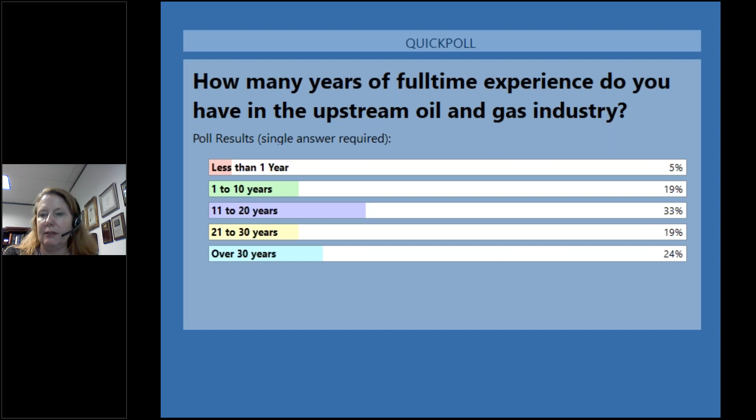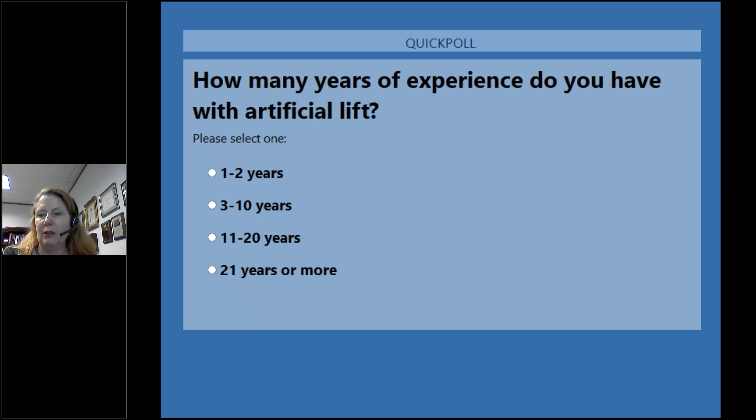Next question: how many years of experience do you have with artificial lift, since that's the topic we'll be discussing today? Looks like we've got a lot of experience in this crowd, pretty good distribution among all the different categories. We've almost got all the votes, so I'm going to go ahead and close that and share those results.

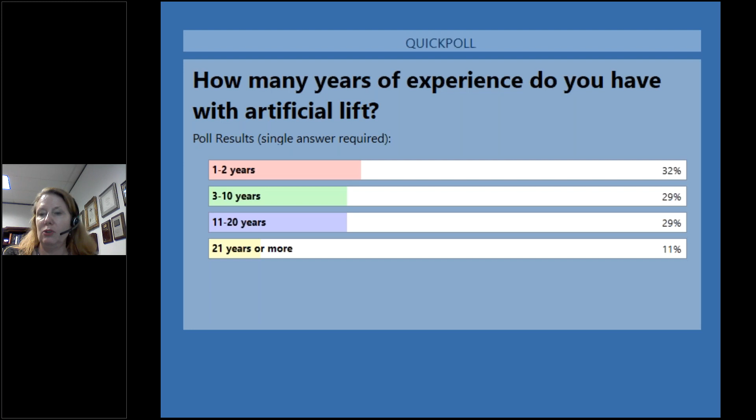It looks like the most are in the 1 to 2 year category, but we do have a pretty good distribution in all the other categories as well.

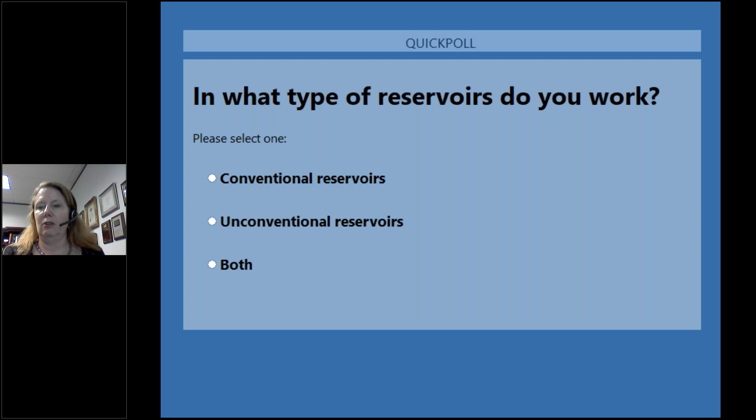Last question: in what type of reservoirs do you work? Either conventional reservoirs, unconventional reservoirs, or both. Looks like we have quite a few that work in both types of reservoirs. The vast majority, I would say, have experience in both types. We've almost got all the votes, so I'll go ahead and close that question and share the results. The majority of you work in both types of reservoirs.

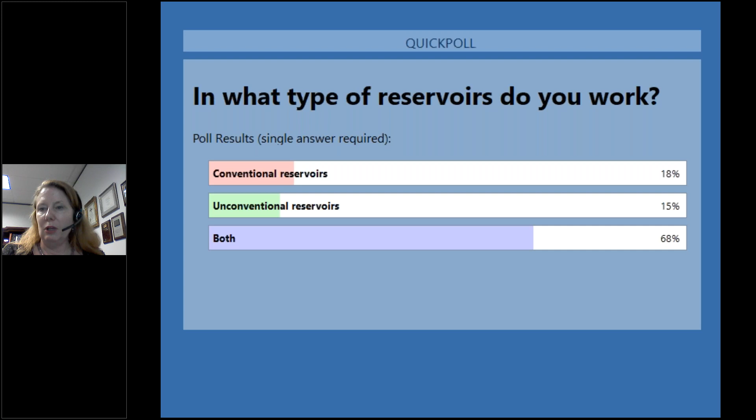I'm going to go ahead and give the presenting rights over to Dr. Chokshi. Let me, let's see, Joseph, can you help me with that, please, as far as handing over presenting rights? Yes, I'm working on that. Or am I going to show the slides from here? I guess you're going to show the slides. Okay, I'll go ahead and do that. Let me pull out of this slide presentation, and we'll move into the presentation here. Okay.

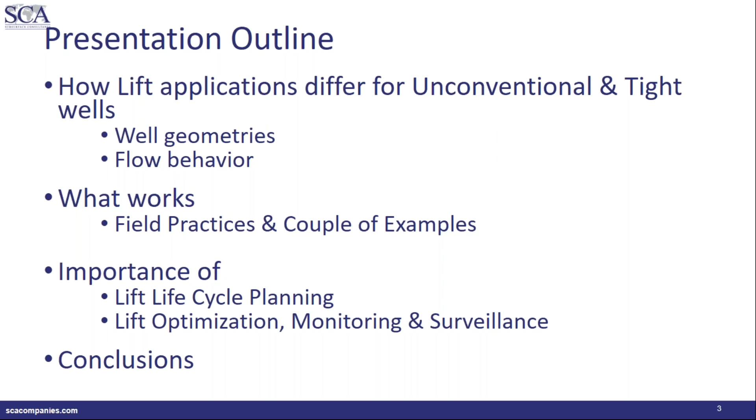The second important aspect is the optimization, monitoring, and surveillance of not only the lift, but in general, the production profile of unconventional wells. We'll conclude afterwards. Next slide, please, Susan.

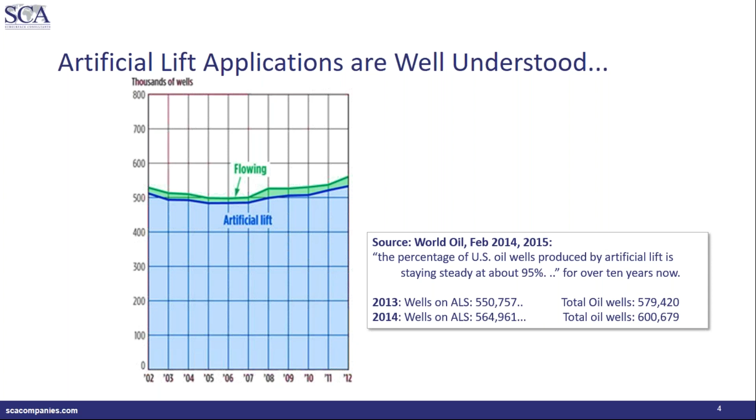When you look at the artificial lift application space, this graphic shows a World Oil survey they present almost every year. From a couple of years ago, they showed that for the past 10 years or so, the number of wells in the United States on artificial lift has remained at about 95% of total producing wells. In my estimation, this ratio might have increased a little, because unconventional wells, which have increased in number in recent years, most of them end up on artificial lift sooner compared to conventional wells.

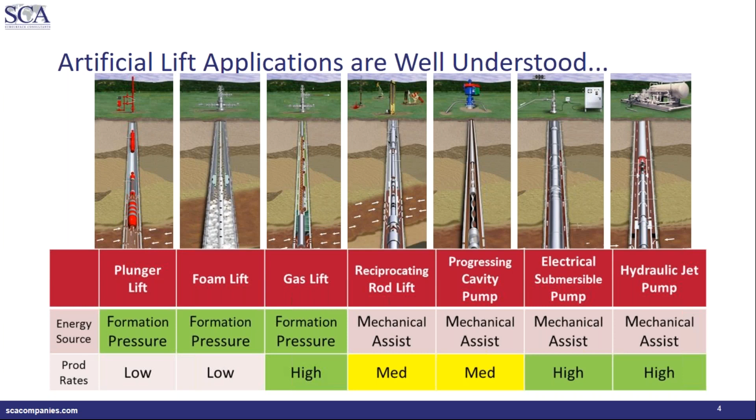In terms of production rate, we can subdivide these lift methods into different buckets: lower producers, meaning typically less than 50 barrels; higher producers, typically more than 2,000 barrels; and middle of the road. So you might say, okay, we understand all these lift applications, so why are we spending this afternoon talking about unconventional? Next slide, please.

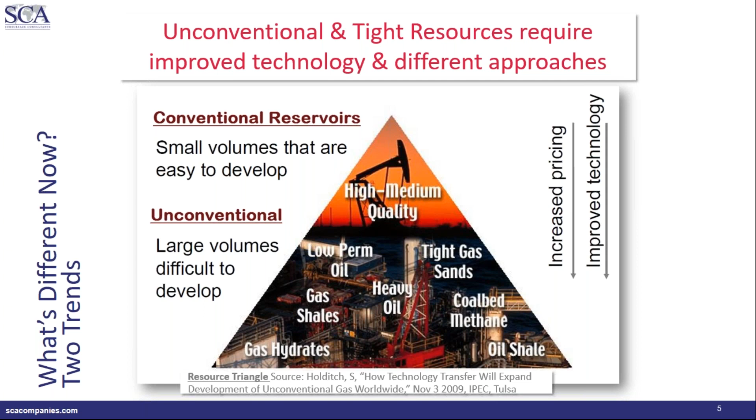So what's different now? First thing, unconventional reservoirs, unlike conventional reservoirs, are more like larger volumes. They are difficult to develop, meaning you require more technology input. There is more cost component, as shown in this technology pyramid from Dr. Holditch.

Next slide, please. The second aspect we're looking at here is from the Baker Hughes USA rig count, as recent as last month. What we're seeing in the background, the purple outline, shows how the number of rigs has changed since 1990.

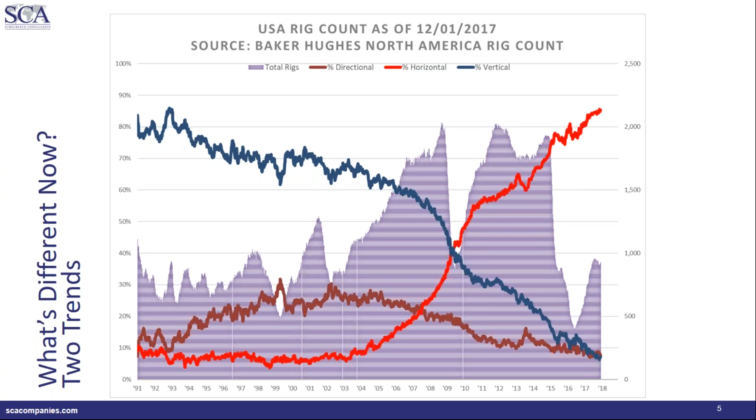Rather than focusing on the absolute number of rigs, let's look at the blue line in the top left corner, which is descending, representing the percentage of rigs drilling vertical completions. Then focus on the orange or red line showing the percentage of rigs drilling horizontal completions. What we're seeing is an inversion, with a crossover occurring around the 2006-2008 timeframe, meaning the number of rigs working on so-called horizontal wells has exploded, and so has the number of wells. Next slide, please.

Now what we are looking at is some data analytics work done based on Rystad Energy's NASWELLCUBE product. On the x-axis, you look at the different unconventional formations, like right from Austin Chalk onwards, and there are three bars for each reservoir, each basin. The blue bar is the measured depth, the orange bar is the true vertical depth, and the gray bar is the lateral length.

What we are seeing typically is, with the exception of maybe one of the older basins, most of them have laterals that are exceeding 5,000 feet, almost a mile long lateral. And if we consider maybe about 10,000 feet TVD, then we are looking at about 2 miles deep and 1 mile on average going out.

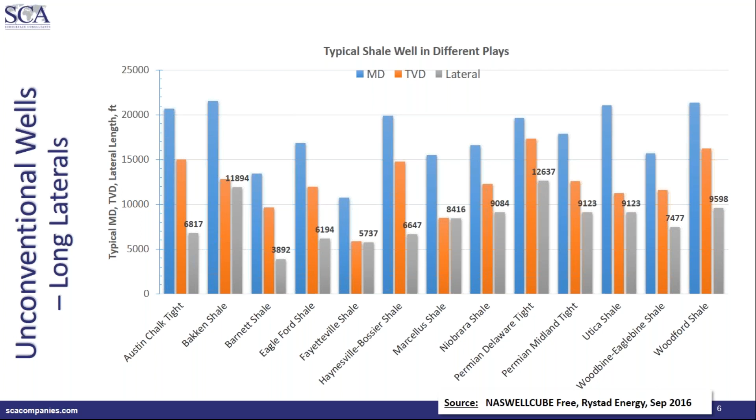So if somebody can visualize, consider a straw which is laid across a football field, okay, 110 yards. We are trying to produce from a 4.5 inch completion or 5.5 inch completion through 5,000 feet length, equivalent to a straw laid across a football field. That is the type of production challenge we have when trying to produce from these horizontal wells. Next slide, please.

Now let's look at some of the flow patterns that we observe in the wellbores. The graphic on the left shows flow patterns in vertical wells. As the gas content increases along the x-axis, the flow pattern changes from bubble through slug, churn, annular, mist, and so on. That is what we are accustomed to dealing with in vertical or conventional wellbores.

We're having some audio issues. Perhaps you can fix your microphone a little bit. Do you hear me better? Hello? No, it's still sounding pretty bad, sorry. Okay, just a second, let me try to change something quick here. I'm afraid that may be due to my setup here.

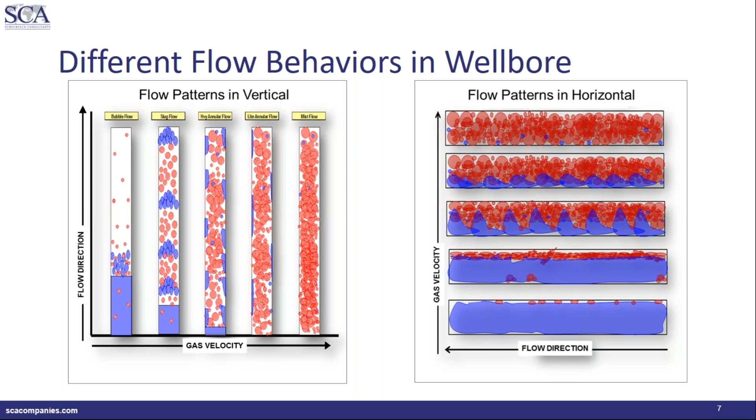So what I was talking about was that the gas, shown here in red, is staying closer to the top of the pipe, and the liquid stays to the bottom of the pipe, even though we are seeing bubble, slug, and annular flow patterns. Now when we think of horizontal wellbores, the first part of the flow goes through pipeline-type flow, and the next part goes through the vertical wells.

Next slide, please. Now, we keep on talking about horizontal wells, but are the laterals truly horizontal? As shown in this graph from Rob Sutton, there are three different patterns. One is toe up, when the end of the lateral is at a higher elevation than the beginning. Toe down, when the end of the lateral is at a lower elevation. And then what we call horizontal, or often referred to as a hybrid, is where the end of the lateral may be at the same elevation or slightly nearby, but there are too many ups and downs, what we call a tortuous well path.

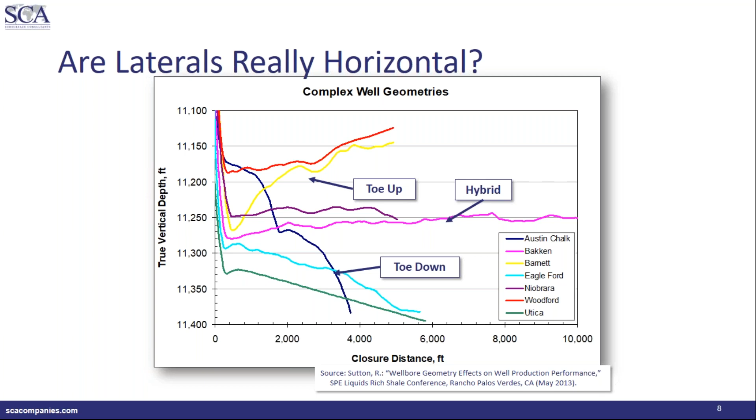So why is that important? Let's go to the next slide, please. Here we are looking at some flow pattern studies, flow pattern maps developed based on studies done at the University of Tulsa Artificial Lift Project. On the left side, these two plots that you're looking at are the superficial velocities plot.

On the left side, you're looking at 1 degree toe up type of inclination, and two boxes showing oil and gas flow conditions typical of unconventional oil and gas locales. For 1 degree toe up, meaning the flow direction is downward, most of the time the flow is in the stratified category. For 1 degree toe down on the right, for the same flow conditions, the flow pattern is slug. So just a small undulation in the wellbore causes the flow pattern to change from slug to segregated to slug to segregated.

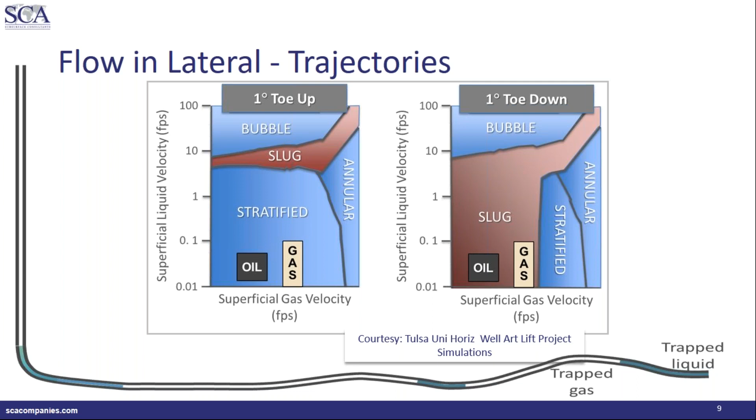That's what we have seen based on measurements done inside the wellbore. What we are seeing in the cartoon at the bottom is that because of such undulations, we will have areas where gas gets trapped, typically in the attic section or slightly higher section, and the lower valley sections is where we see liquid trapped. Liquid gets trapped between two gas pockets, and when the pressure increases in the gas pockets, it blows the liquid out. That's what leads to highly unstable, sluggy type of flow behavior, not only in the lateral, but also in the vertical section.

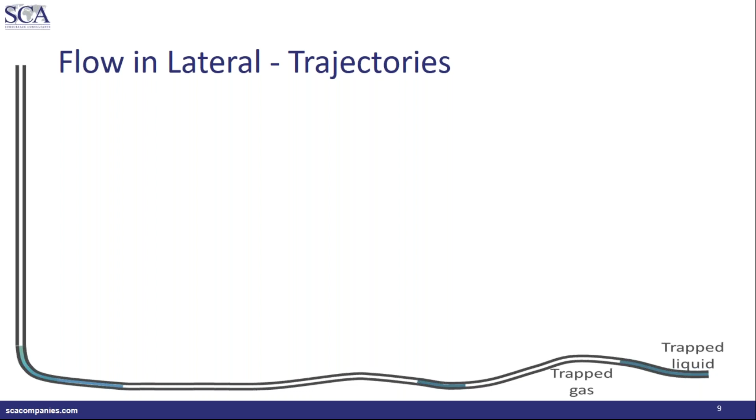We are not going to see a movie, my apologies to all in advance, because of some technical issues with my laptop. There was supposed to be a very nice movie from University of Tulsa experimental setup that shows how these flow patterns change with toe up, toe down geometry. But the takeaway is essentially what we saw in the simulation earlier: even if we go just 1 degree up or down, we see significant flow pattern changes.

Now we are seeing large liquid slugs followed by gas bubbles followed by liquid slugs. Not only that, we have surface equipment that gets upset because of gas liquid separation issues, and we have pressure monitoring and production monitoring issues also. Back pressure management also becomes a challenge due to these surging flows.

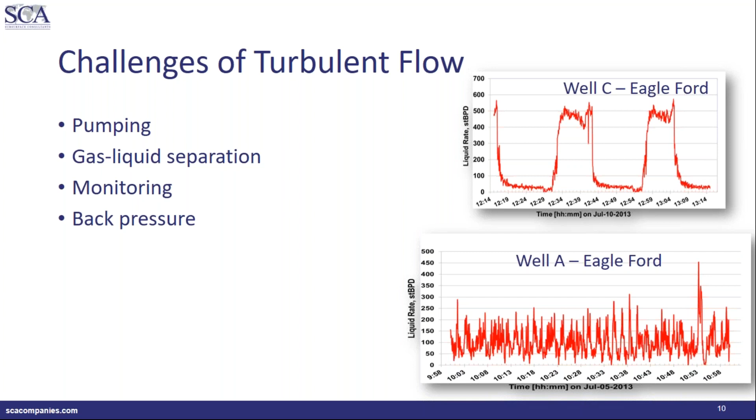One more thing I'd like to point out is that the periodicity of this slugging event is not uniform. In two similarly completed wells, we might see completely different behavior of slugging, and that's apparent in well A, which has a periodicity but with much smaller frequency, and it's not as well defined as well C.

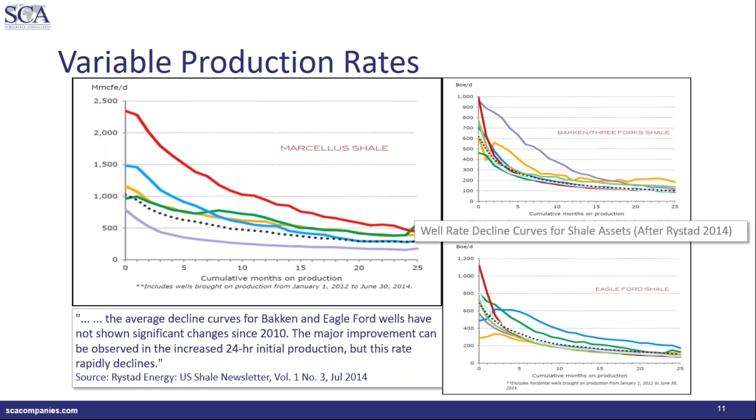This is something which we had not seen in conventional before. So as production engineers, as artificial lift engineers, we need to be prepared for and plan for a wide range of production rates. And I should say not only a range of rates, but also the phase quantities are varying, the phase fractions are varying, shorter term as well as medium to longer term. That's where we have a major challenge with artificial lift applications.

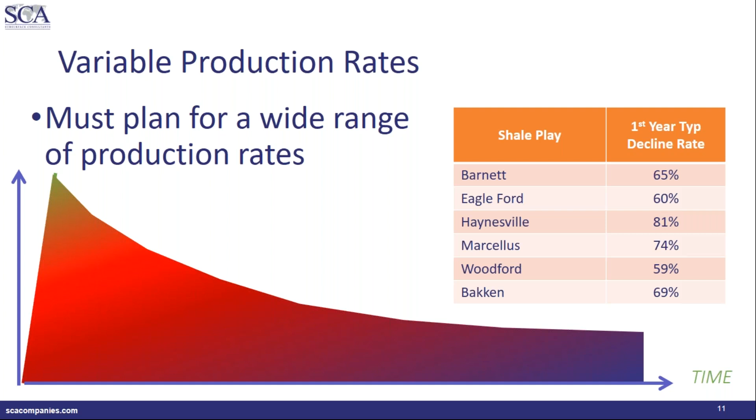We are also seeing some inflow phase distribution challenges because, depending upon the type of completion, some perforation clusters or fracturing clusters may not yield as much as was originally planned. As a result, we may have inflow phase distribution that is not what was expected. This has been proven using downhole measurements, basically fiber optic based sensing as well as some flow meters.

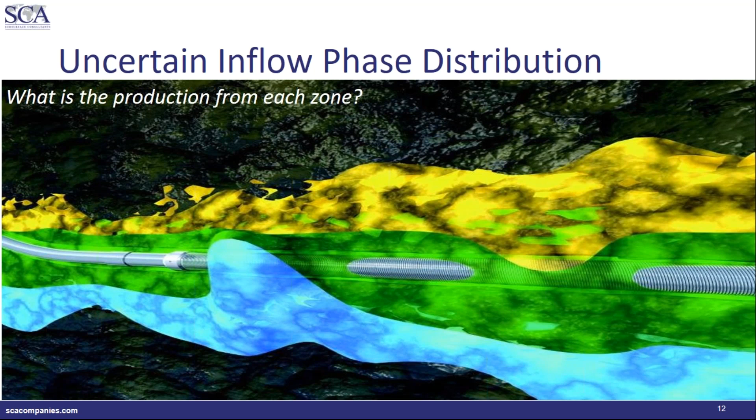So if we have to summarize the challenges, we are looking at deep, long, slender well geometries. One topic I did not touch upon, which has been discussed often, is the impact of this well geometry on the estimated ultimate recovery, or EUR. From the production perspective, there is slug and turbulent flow, rapidly changing production rate, rapidly changing phase fractions, and uncertain inflow phase distribution. That is what causes lots of challenges for artificial lift selection as well as application.

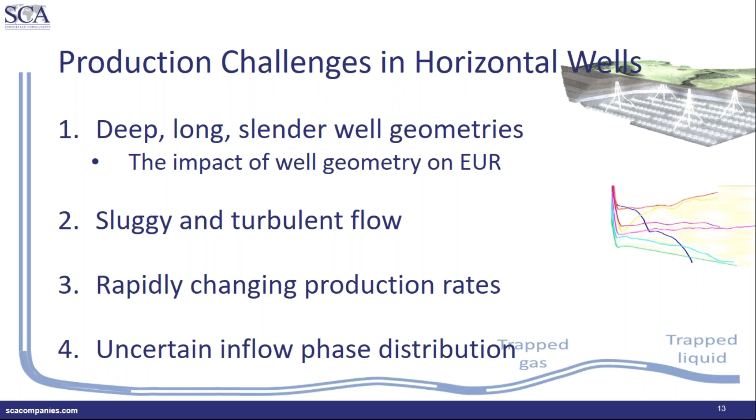So what are the lessons that we have learned based on the things that we have applied in the field? As I showed earlier, there are eight forms of artificial lift. One form that has not been applied, and has been ruled out completely, is progressing cavity pumping, and that has to do with the depth of application. So other than progressing cavity pumping, most all other forms of lift that I talked about have been applied.

So let's see what the observations have been so far. Next one, please.

One thing is for sure: we need to have production engineers, as well as operations people, involved when decisions are made related to well design, particularly well geometry. If we can have some toe-up orientation, that can help possibly with draining the lateral. Now that brings up other challenges, but we'll not talk about those right now. Having a rat hole that allows us to lower artificial lift equipment inside it also helps take care of the gas separation issue. Another point: if we can control the tortuosity or minimize the undulations inside the lateral, that helps with this rapid phase fluctuation situation.

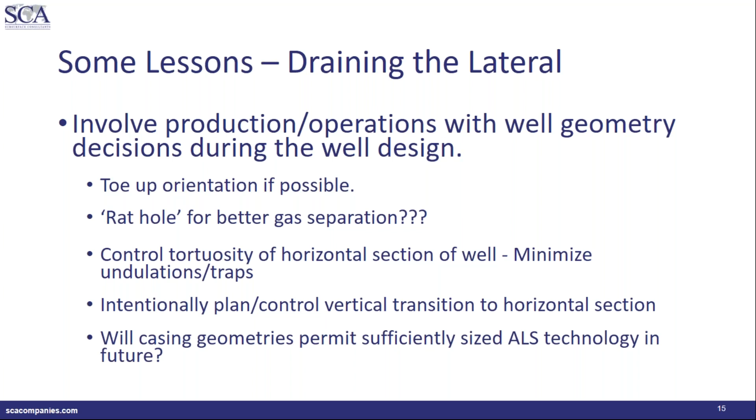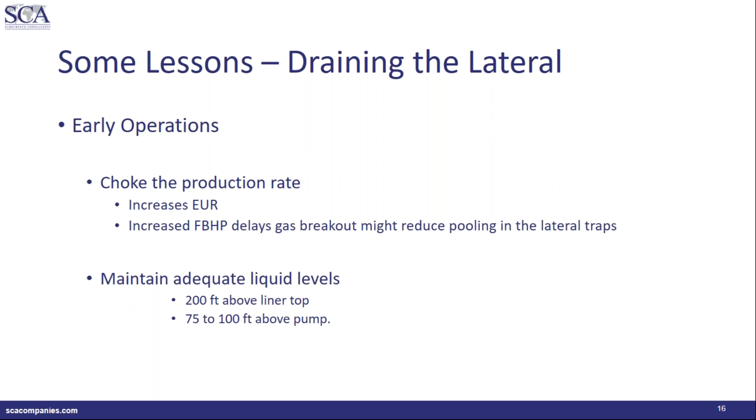During early operations, people began to realize that choking the well seemed to help in the longer term. In the immediate term, we give up some production, but in the longer term, we improve the EUR, estimated ultimate recovery. Also, because of the choking, we minimize some facility upset issues and lift system management issues, since gas is not breaking out of solution as much. So maintaining the liquid level also helps keep the gas more in solution and not break out while the lift system is handling the phases.

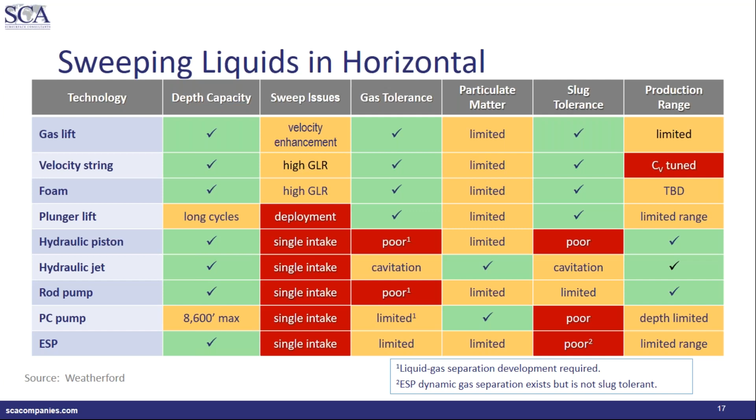I won't be able to walk you through this entire table, but during the training session we'll have a chance to go through all the details. This is a very handy table that shows how different lift methods perform on different criteria, whether it's handling gas or slugging tendencies, solids control, depth capacity, and such. As you can see, certain methods perform well in some areas, but there is not a single answer that performs uniformly across all criteria. That's why we need to go over the details in a session longer than this 30-minute webinar. Next one, please.

So in general, the consensus seemed to be that for liquid-rich formations, gas lift and ESP seem to be the choice, as well as jet pump, when we have higher production rates. Then as the production rate starts declining, people seem to be moving from gas lift to maybe rod pump or gas-assisted plunger lift, and so on.

In gassy production, when liquid quantities are smaller and the challenge is more about removing liquid or deliquification, gas lift is also useful. Jet pump is used primarily for fracturing fluid flow back in this particular case. Plunger lift is deployed, and capillary injection is often used for injecting foam or surfactant. In some cases, it can also be used for scale treatment and other corrosion treatment.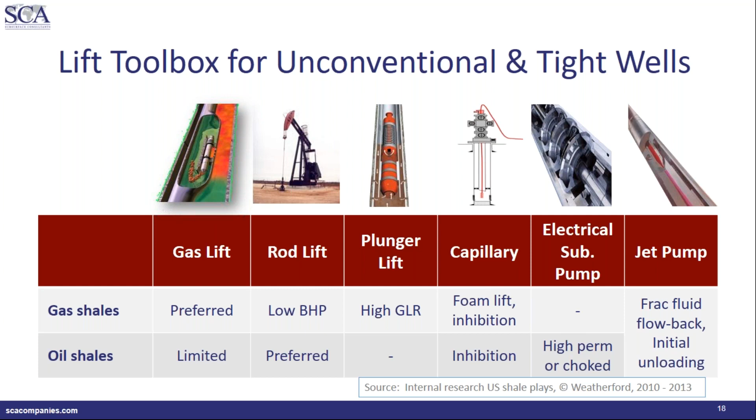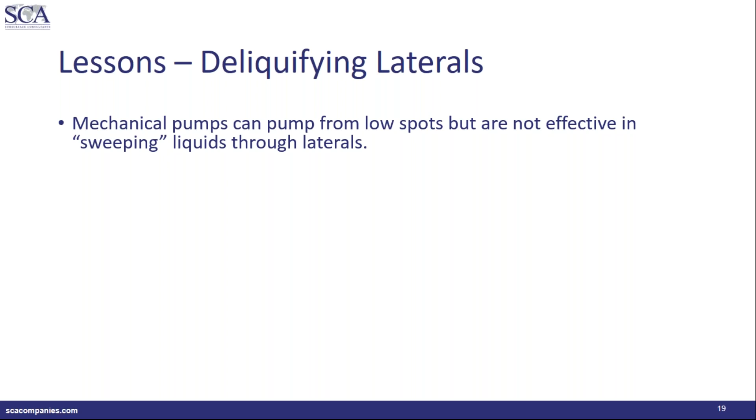As far as deliquifying laterals go, mechanical pumps have some challenges because of how their intakes are positioned. Gas interference seemed to be the biggest challenge with ESP and rod pump, what we call mechanical pumps. Gas lift seems to thrive on the gas, so we don't have those challenges with gas lift. So in this case, the industry seemed to be moving more towards gas anchor type solutions. There are also a few other things coming on the market that help regulate the gas quantity that passes through.

As I was saying earlier, if we have a straight section in the deviated area, most of the time people do not take the pumps into the lateral. Actually, I've seen very few cases where pumps are taken into the lateral. If we want the pump intake as close to the reservoir as possible, we'd like to keep them in the deviated section, then try to have a straight section. If you want to keep it in the deviated section, try to keep it in a straight 50 or 100-foot long section where the pump can be landed. For most part, it's beneficial to keep it in the vertical section. In that case, having a rat hole type of completion really helps with gas separation.

Now, I cannot emphasize this enough. Having continuous surveillance, followed by analysis of not only the lift but also the production, is very critical for unconventional wells, because as we saw earlier, not only phase fractions but phase rates also change in a relatively short time. So having some kind of surveillance system not only lets us assess the health of the reservoir, but also helps us prioritize the next set of tasks and make quick adjustments as needed. Making this investment earlier in the life cycle, when the well is on paper, even before it's drilled, is very important for unconventional wells.

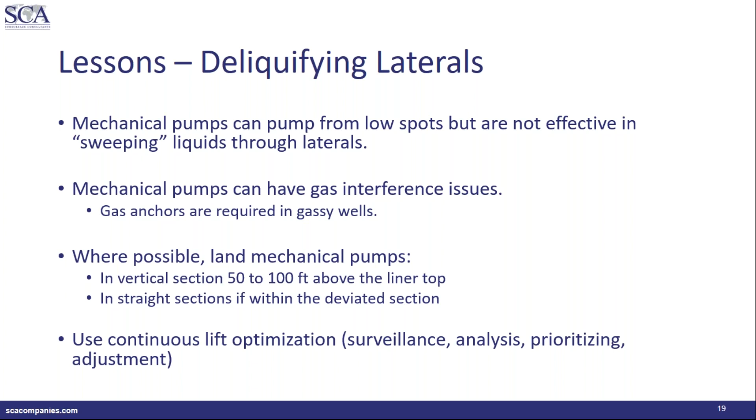Let's skip this one. This one also. I wanted to cover some of the important lessons, that's why we are skipping a couple of slides here.

This particular slide captures all the lift methods and how they are applied during the different production phases. During the early production phase, when production rates are high but rapidly declining, companies or operators are typically using jet pump, ESP, and gas lift seems to be gaining a lot of favor amongst operators, even in basins where people have not tried gas lift before. Once the production flattens out, somewhere around middle to late production, rod pump becomes the preferred method. Gas lift may continue. In case of gassy production, we can start with gas lift and then switch over to plunger lift, and hydraulic piston pump also has some application in deliquifying.

One thing to keep in mind is that as we switch from one lift method to another, we'll have to call some workover rigs for lift changes, like ESP to gas lift changeover or so forth. So if we can come up with a completion scheme from the very beginning so that we don't have to call the workover rig, that will not only help with lost production but also save some money.

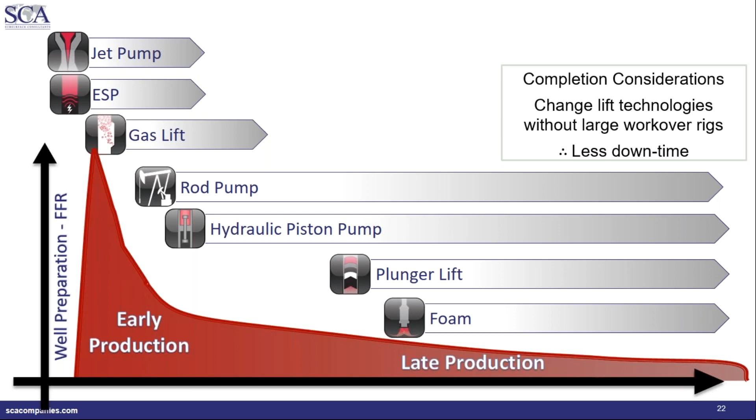Here is one example of how the completion can be lowered with gas lift valves in place, and then the jet pump is circulated in. Initially the well is unloaded as well as produced using jet pump.

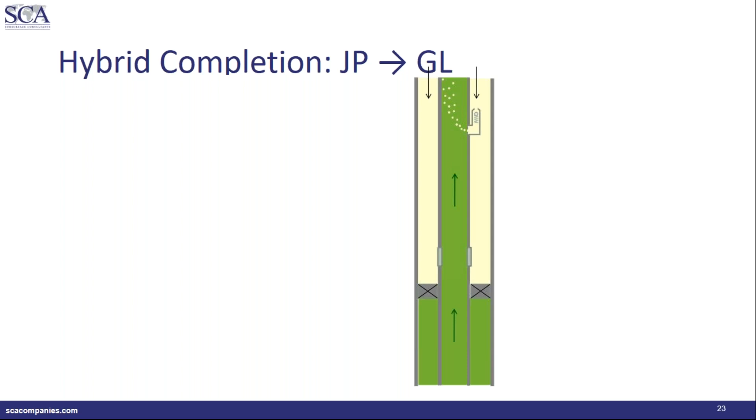Once we are outside the application envelope for the jet pump, we can just circulate the pump out, close the sliding sleeve, and convert the well into gas lift without calling the heavy rig on the site, avoiding the associated downtime. So having a hybrid completion like this can be helpful.

Let's skip this one.

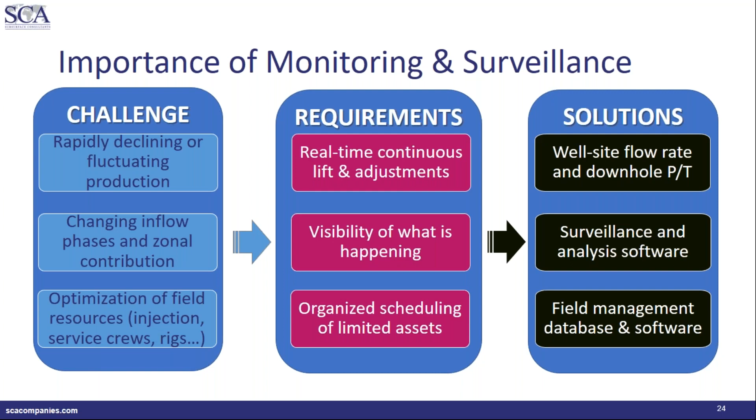Going on to surveillance and monitoring, as we saw earlier, with such rapid changes in the production rate as well as pressures and phases, having accurate and timely monitoring is very critical for production management. We cannot have just snapshots like production logs, because they give us just one point in time, whereas continuous monitoring with downhole gauges that give us pressure and temperature in real time is essential for this.

Now, just having those downhole gauges does not solve the problem. We need to have also a very good data visualization and analysis software. In my opinion, that is where lots of work is being done and needs to be done, whereby we can have the capability to digest all this data coming from downhole gauges. More companies are moving towards that path.

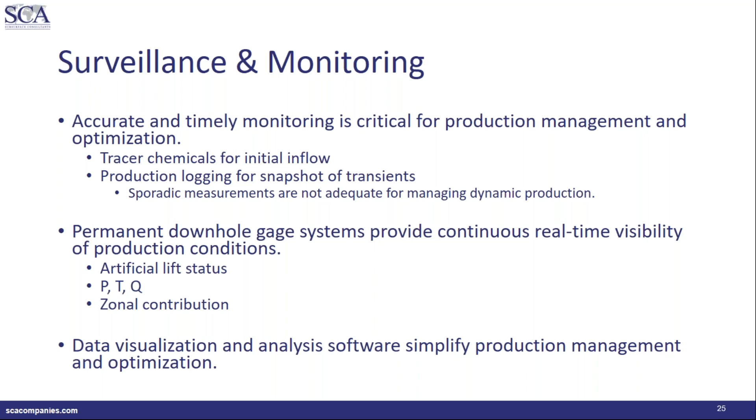So now visualize if you have a rod pump operating with these 100 psi fluctuations at the intake, meaning corresponding liquid and gas quantity coming in at the intake. Your pump is going to get flooded, followed by gas locked. So having these downhole gauges can help us manage the speed of the pumping equipment so that it doesn't get gas locked and so on.

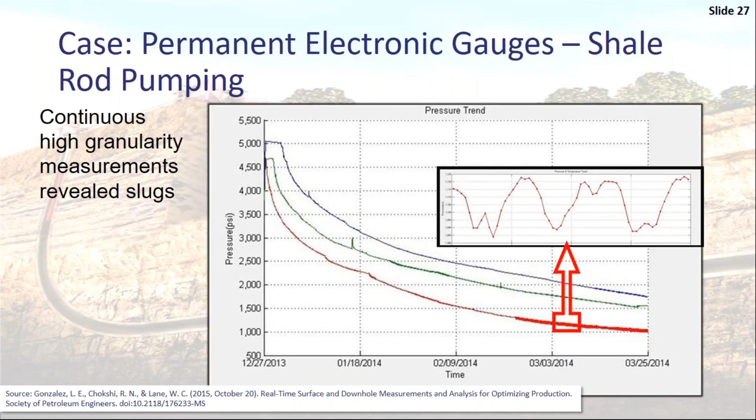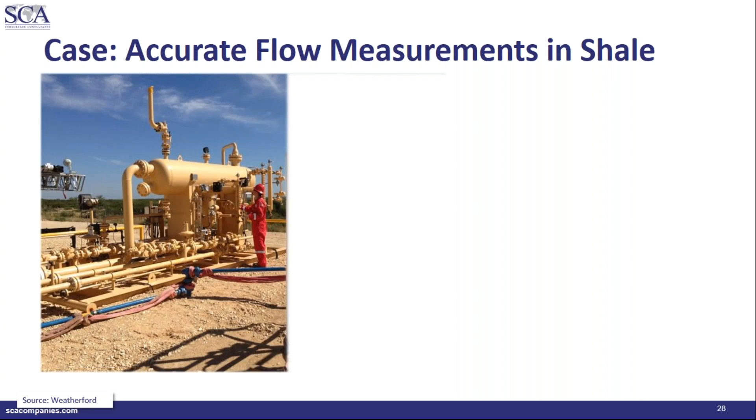Now here is another example of how having a surface flow measurement, multi-phase flow measurement, helps. What we are looking at is a production test separator, typically costing upwards of $500,000 or so. In a pad-based development, having such production test separators all over the field can be quite a costly endeavor.

So what we are seeing here is that operator utilizing a multi-phase flow meter at the surface that can give you very high frequency measurements in real time of what is happening in terms of the production coming out, which is not possible with conventional production test separators that are shown on the left.

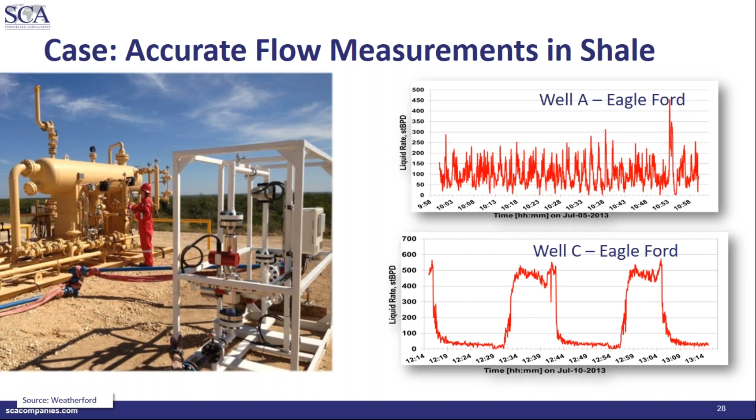So the plots that we saw earlier from two wells in Eagle Ford were captured using this device that is shown on the right here. As you can see, it's a very compact, skid-mounted device that can be taken on the back of a truck, allowing us to test our wells with much higher frequency and in real time.

So to conclude this presentation, how do artificial lift applications differ for unconventional and tight wells? Well geometries and tortuosity in the laterals pose significant production challenges in the form of slugging that is occurring, changes in the phase fraction, changes in the flow, not only in the shorter term but also over the longer term. So understanding this flow behavior is very important, and we still do not have a complete handle on it. We still need to work on it.

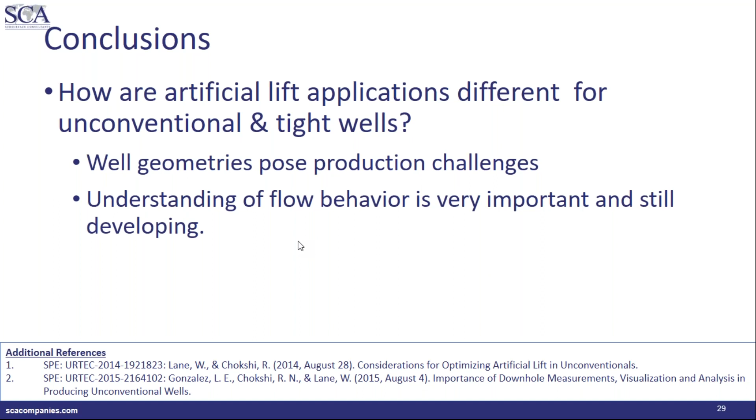At the bottom, you're seeing a couple of papers based on which this talk has been developed. If you'd like to read more, you may refer to those SPE papers.

Now, what we need to do, as I said earlier, is have production guys involved during the well design phase. This morning I was reading the Journal of Petroleum Technology, and there was a comment from the completions technical editor of JPT. I'll read it verbatim: acceleration of drilling speed is leading to problems down the road with completion and production practices, both of which are huge drivers of the ultimate recovery. That itself shows how having production guys involved during the well design phase can help not only minimize production problems but also improve ultimate estimated recovery.

The second point is that we have to be flexible about selecting the lift systems. Not only our mindset needs to be flexible, but lift systems also need to be flexible, and that's where the vendor community is doing a lot of work. We, as production practitioners, need to stay abreast and stay current on what is being done now.